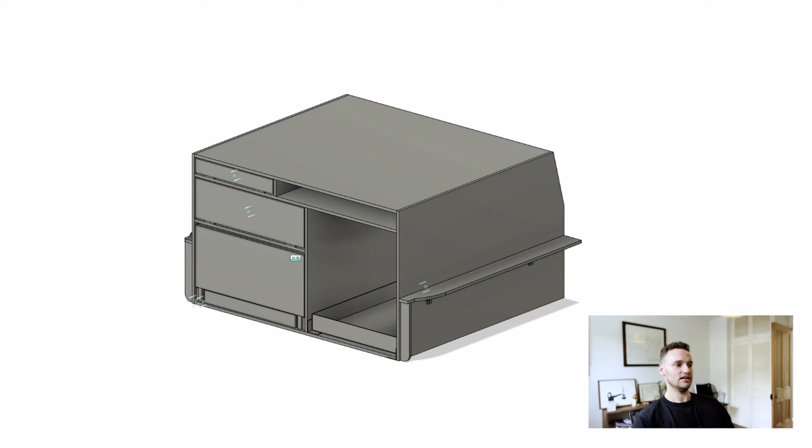Because I love visuals and because I love planning, but especially because I knew I would stuff everything up if I hopped straight onto the tools, I designed the drawers in CAD first. I'm using Fusion 360, but you could use something like Google SketchUp if you wanted to do something like this yourself. The main aims of the drawer design is to minimize the amount of things that we bring in and out of the car. The other aim is to minimize setup and pack up time.

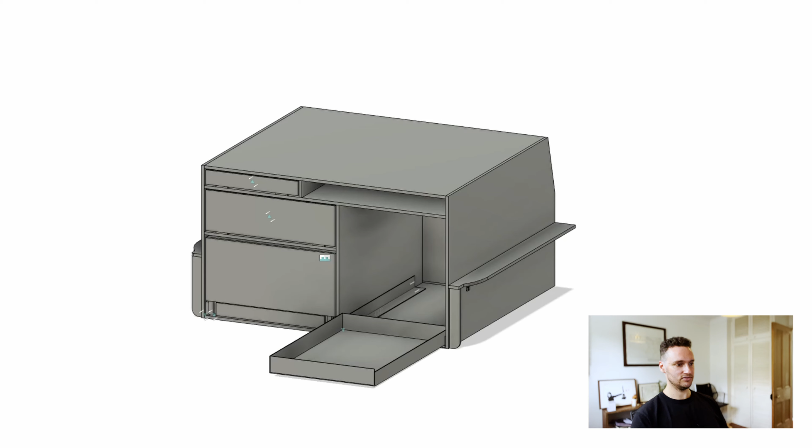On the right, I've got a fridge slide. This is nice and low for easy access to the fridge. The current drawers I've got, the fridge sits high and we don't have a fridge slide, so the fridge is a bloody hassle to access. It's ridiculous. On the left is a pull-out kitchen drawer. This has a 2-burner gas stove and space for utensils and a small pantry drawer.

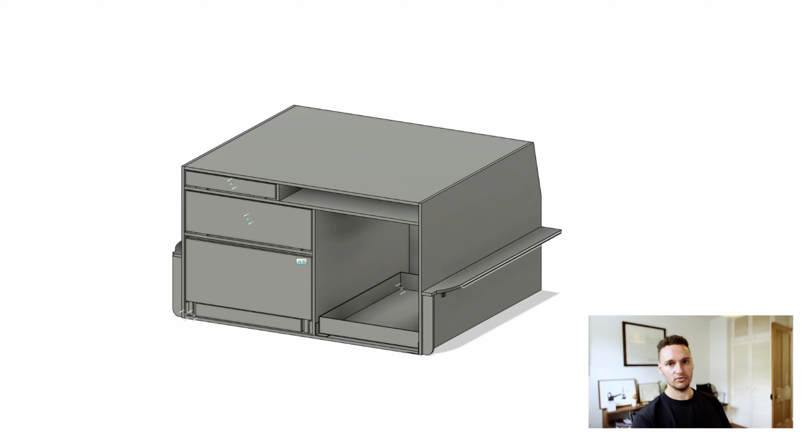I was going to build an extension slide on this. I decided not to do that because I have a table slot up here for any additional table space if needed. On the sides of the drawers are 2 platforms that I can drop things down to, so it's just extra storage space, and I have these small panels here at the front for switches.

On the back is where all the fun 12 volt stuff goes. So I've got a 100 amp hour lithium battery, 12 volt panel here, and this is placeholder space for another battery or an inverter if I want one in the future.

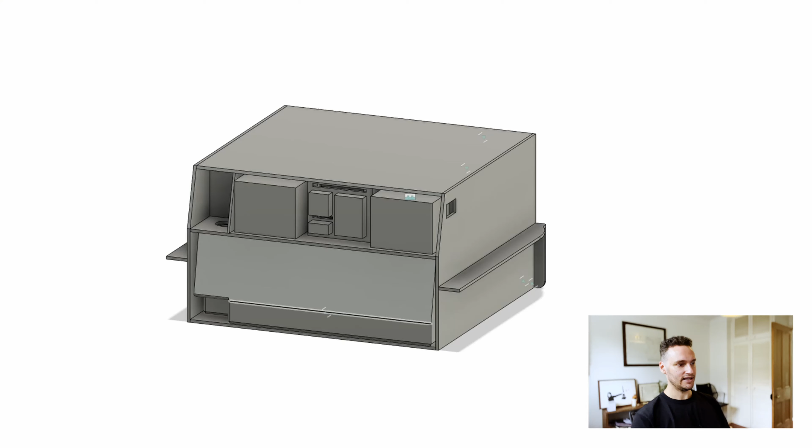Here is a 50 litre water tank. This is a Front Runner tank. It sits here nicely behind the rear seats and replaces the 2 whopping big 25 litre water jugs we currently use.

I really recommend designing in CAD or sketching your design before you start building. Mistakes here are free and it helps to visualize and sort out any issues with the design before you start building. I've definitely caught so many potential issues before I hopped onto the tools. Really thankful I did it.

The first thing I need to do before I can begin building the new drawers is prep the boot by removing the old drawers. Obviously they need to come out anyway, but getting them out will also mean I can confirm my measurements and begin cutting timber for the base and main shell of the new drawer system. The drawers were not fixed in and came out easily.

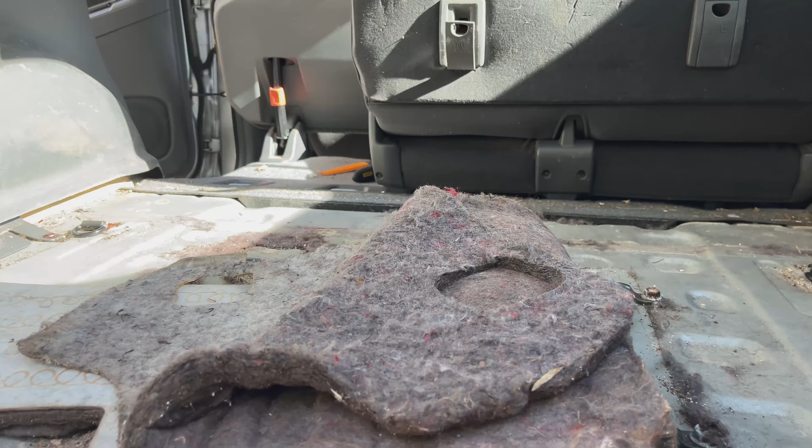Well, this thing's completely had it. Fully grotty, really wet, filled with dust. Obviously hasn't been changed or touched since 2005 when this thing came out of the factory. But I didn't anticipate this.

I am a little worried about the water. When I installed the roof racks, I didn't put the rubber channel liners back in, so I'm hoping it's just water leaking or running down the channel, coming in through the dodgy door seal here, and running down to the bottom of the boot and soaking through the mat.

Got to go to the shops and replace this and continue cleaning. The side panels of the boot also need to come out. These plastic things are fixed in with some bolts, easily removed, and allow access to more of the boot floor. I also wanted to remove these as part of my deep clean and to get an idea about where I might run some of the electrical cables later on.

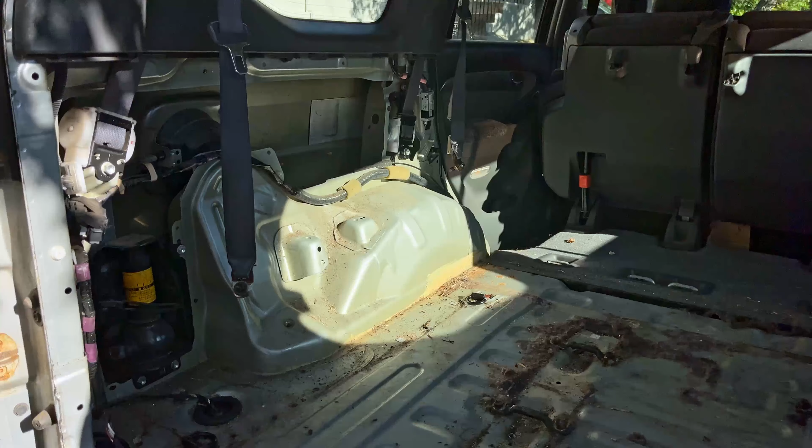Finally got all the panels off, and as you can see, it is bloody filthy. So it'll be awesome to clean all this and make it all nice and neat, ready for the drawers.

The good thing about having pulled up all this old liner is it's exposed a heap of grommets I can use for plumbing the back water tap later on. So if I pop this one off, you can see direct access to the outside. That'll be handy. A couple over here as well.

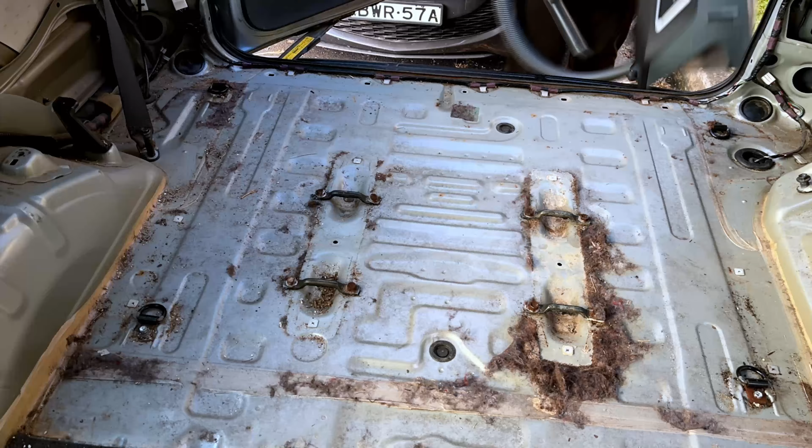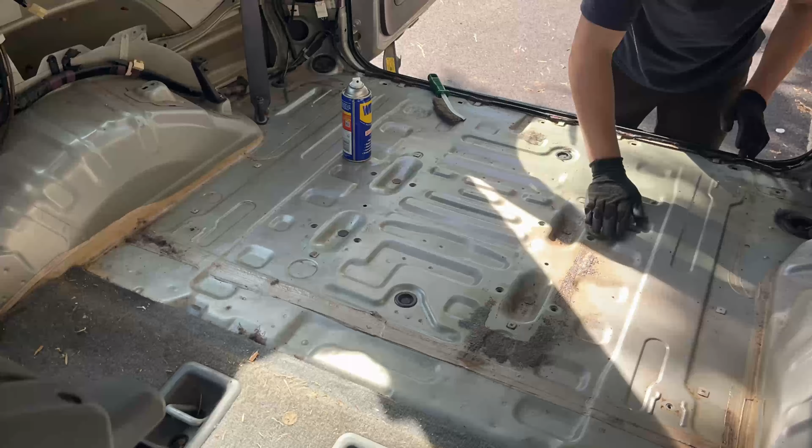There are quite a few bolts and brackets throughout the boot I want to clean, and a bunch of surface rust to clean off. I'm using a wire brush and WD-40 to get rid of the surface rust, and I also went over some of the more serious rust spots with paint. This will be good for protecting against future water buildup if it does happen. It's also really satisfying to get the boot ultra clean.

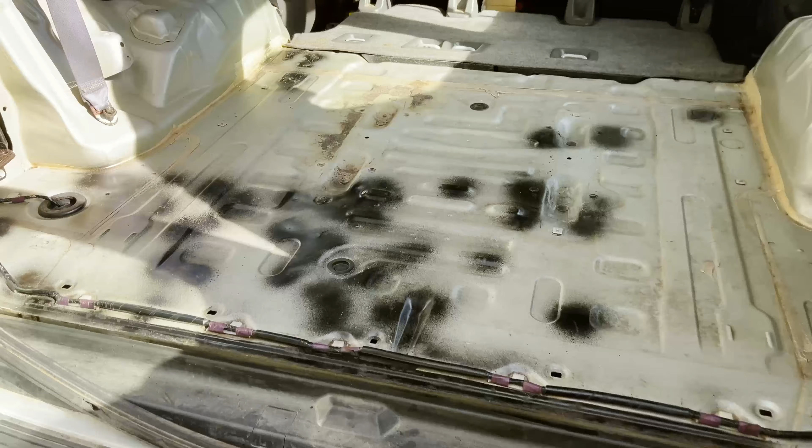I've finished the cleaning, touched up some rust spots everywhere, given everything a good scrub, vacuumed. Probably went overboard, but I wanted to make sure all this was clean.

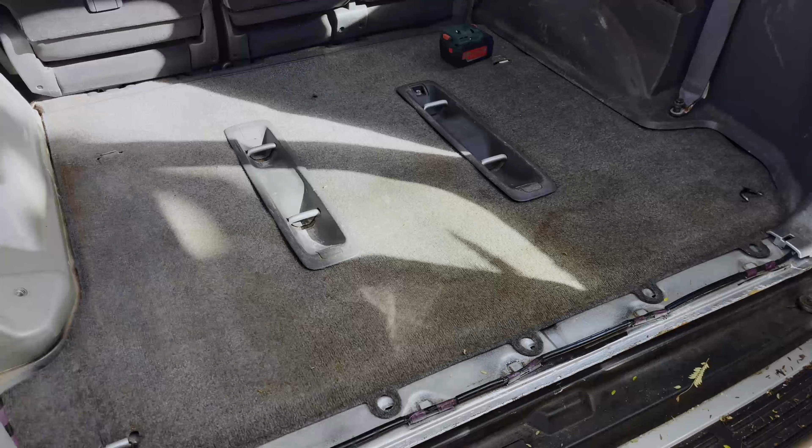With the old drawers, the carpet and the panels removed from the boot, I can go to town on cleaning the carpet, which I'll be keeping.

I've got some carpet cleaner, I'm going to just hit it with some of that now. It smells a little, this carpet, so... The carpet came up good with a bit of this carpet cleaner and a vacuum. It no longer smells and is ready to go back in.

Alrighty, I've got the boot clean and I can finally start building the drawers. Super excited, I've been waiting 9 months to get started on building them. First step, I'm going to install a cargo barrier.

This is a half height barrier from Kaon, made specifically for the Prado 120. The reason I got a half height barrier was to avoid the full-size ones and how they tilt towards the back of the car and reduce the amount of space you have at the bottom. So I didn't want that to eat into the length of the drawers.

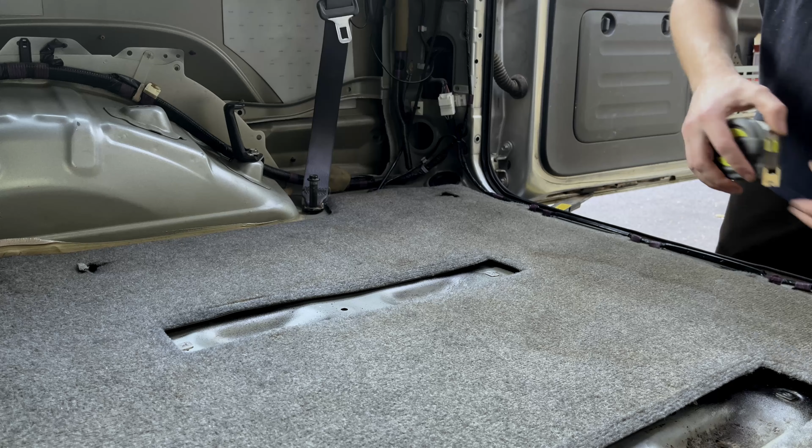With the barrier in, I could finally begin cutting some wood. This clip shows me anxiously preparing to make the first cuts in the raw timber sheets. It was actually my first time ever using a circular saw to cut timber sheets to size, and I needed to do it precisely. I look back on this with a mixture of frustration and satisfaction. I've learnt so much since, but I wasted so much time worrying about getting the cut right.

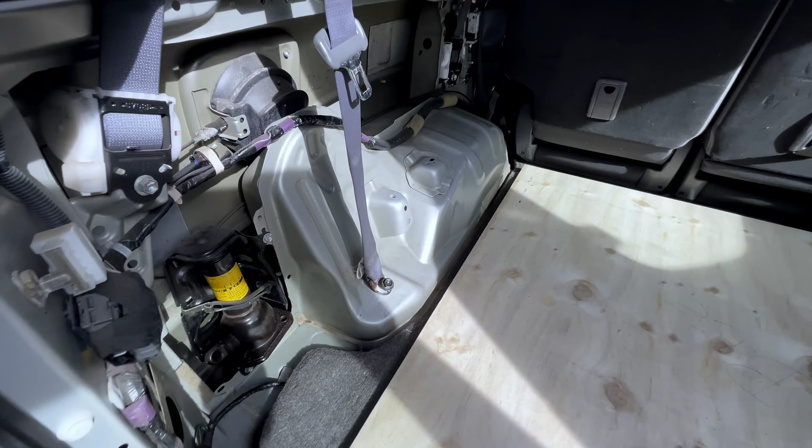Base is in, test fit done, looking good. Really excited to see some wood in the car. Side panels need to go in still, so this gap here will be closed in by them somewhat, and there's also a plastic trim to go here, which will also fill that space in.

Finished cutting the main frame of the drawers, so the sides, bottom and top. This top bit here will sit in between the two side panels. I've cut an angle into the back of the side panels so that they sit nicely against the cargo barrier and then curve down towards the back of the seats there, sitting flush with them. Now I am going to start nailing the frame together, and I can start putting the internal panels in.

There was so much timber to cut. It took forever, probably about 2 weekends worth of time cutting all the timber to size, and I sorely wished for a table saw.

Once everything was cut, I could begin assembly of the cabinet interior.

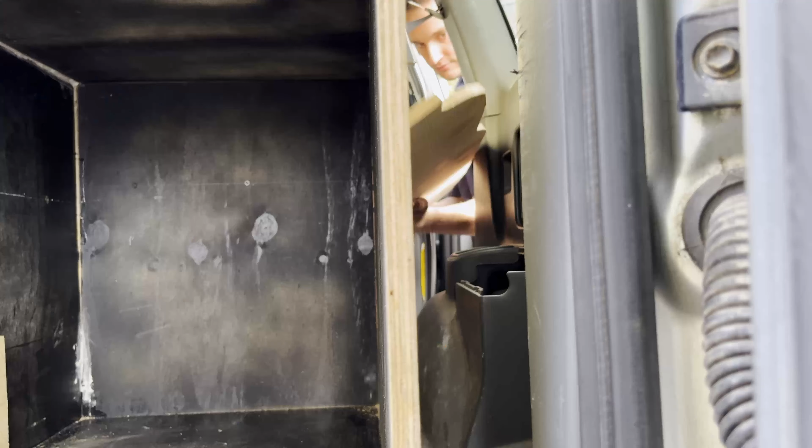Check it out, fits first go. I'm super happy. I was really expecting this to be a big hassle, but this panel is sitting here nicely.

Turns out I did cut this wrong after all. I've put both side walls back in now. I didn't have the side wall over there in before when I cut these wings to size, but all good. I should just be able to take off a length from the right hand side here, and on I go.

I've finished cutting out these side panels now. These are going to sit between the drawers and the boot door at the back. I'm going to use them as a panel for switches. I've got an Anderson socket for an inlet for solar panel charging, as well as a Victron battery charger. That'll sit down there. I've got a USB charger outlet and some switch housings, these are going to be switches for the water pump and awning lights. So I've got 2 of these panels, one on either side of the drawers - one is going to have 12 volt switches, the other's going to have the charging outlets.

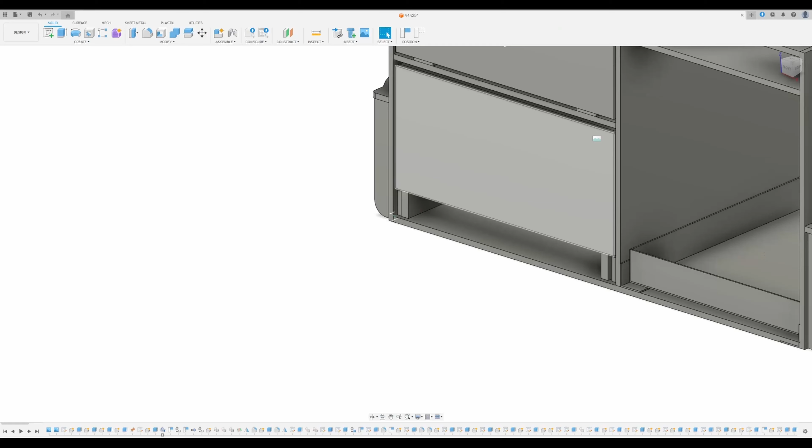Now ready to begin on one of the parts of the drawers I've been really looking forward to, which is the kitchen drawer. I've got some good plans for it, including putting in a 2-burner stove. I've got a Dometic 2-burner that you'd put in a caravan, which I'll be fixing direct into the kitchen drawer, so I'll be able to just pull it out and have a gas stove right there, which I think is pretty awesome.

To build it, I'm going to be using a mix of 9mm and 12mm ply. I've also got this 18mm hardwood countertop.

Here's me waffling on about why I chose this stove. To summarise, it's small, uses minimal gas - I calculated it will last 9 hours with both burners on - and it sits flat on the counter, so with the lid closed you don't lose bench space.

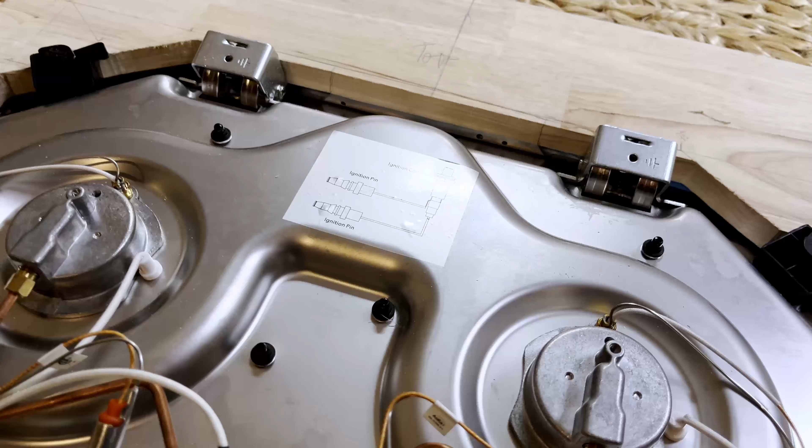Almost got it in place and fitting well. The only bit now that's not sitting quite right is the lip on the stove, it's still not sitting flush with the wood, so I just got to take off a tiny bit there, but otherwise it's sitting well and I'm super happy. It wasn't as complicated in the end as I thought it would be.

At this point I thought only minor adjustments would be needed to fit the stove, but I ended up spending another 40 minutes or so cutting and filing.

Stove looks good. I'm excited to use it - 2-burner, piezo ignition. Looks super neat.

Once again, I found myself with a heap of cutting to do, this time for the kitchen drawer. Now I'm going to cut a hole and mount the gas bayonet socket.